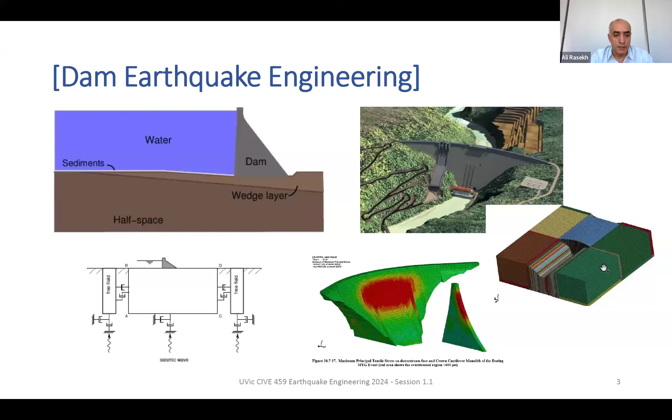This one is from about 5 years ago. This is a model of the Lewis Lake Dam, which is in BC, on the Sunshine Coast, very close to the city of Powell River. It's a very nice arch dam.

The owner was private sector, however the regulators basically want them to check their dams regularly to make sure they withstand the latest estimates of earthquakes, because the estimate of earthquakes in BC or in Canada have increased through the years. They asked us to do a study of the dam's response to earthquake.

On this side, I was part of the team who did a study on a rockfill dam, like this type of dam. They are called tailing dams, and they hold off the tailings, the remaining parts of a mining project.

Similarly, this one was in Peru, in South America, and we did an earthquake study to make sure that during the worst earthquake this tailing dam doesn't fail, which again was an earthquake study, a dam earthquake study.

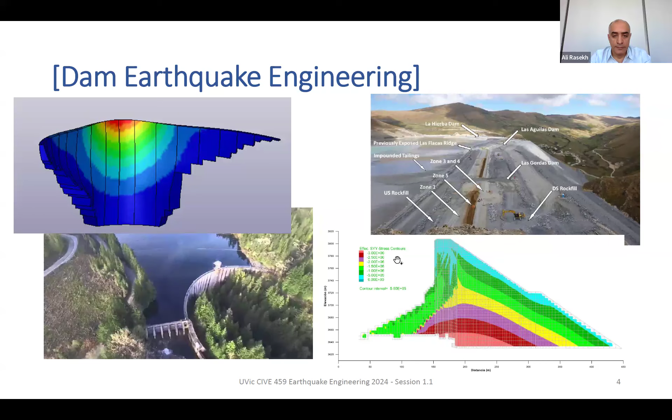So that was generally a high-level introduction of myself. Now getting back to the course, and what I imagine you guys have familiarity with.

We want to do more earthquake dynamic analysis. So I assume you guys already have some analysis background and can complete a static loads analysis. You have some familiarity with the most important materials in structural engineering, which is steel, concrete, and timber, and others. And how structural loads, especially everyday loads, meaning dead loads, live loads, wind, snow, and then earthquake - that's what we do in this course.

But I expect that you generally understand the concept of different loads and how to figure them out using the NBCC code or other related codes. Also, by the end of this term, we will touch on some steel design and some concrete design as far as it's related to earthquake design. I assume you guys are already familiar with the basics for regular, more daily loads.

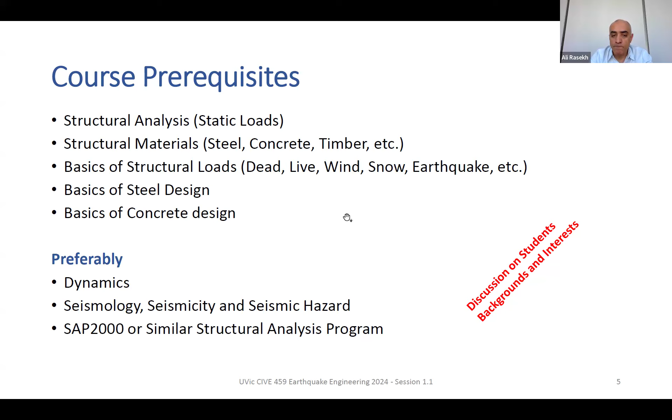Now, if you guys want to, anybody wants to talk about what they think about these prerequisites, or where they are, or do they think the students really meet these prerequisites? Just unmute your phone and tell me about your understanding. Anybody wants to object or discuss further on the prerequisites of the course?

Let's see if there's anything in chat. Okay, thank you. I also think it's good. I think it was developed through years, so there was general agreement and understanding that this is a good idea, that these are achievable as prerequisites or the preferable courses. Excellent, okay, let's move on.

Let's go to the overview of the course. As I divided the course, I divided it into 10 modules. Starting from next week, we will be for 2 weeks at least, but it normally extends a bit more because we need to go through some exercises. For at least 2 weeks, we will be mostly focused on dynamics of a structure, as if it's a course on dynamics of a structure, covering both single degree of freedom and multiple degrees of freedom.

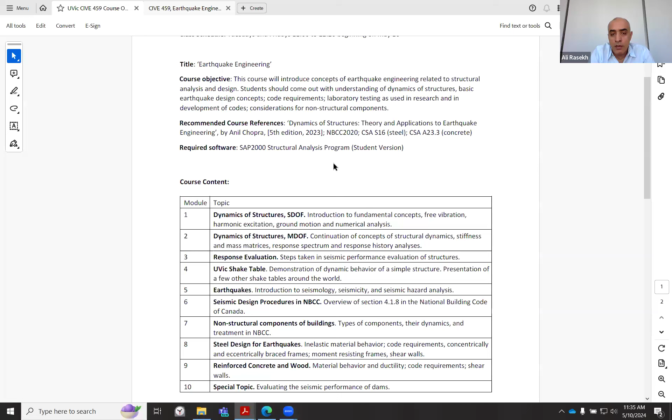SAP2000 is required. I guess you can obtain a license from UVic on your own laptop. There is also a lab, though I haven't been to it myself. I know you can work on campus using department computers, I would assume. Just let me know or email me if you have trouble installing the software or getting the license. We will use SAP2000 in the course, and a lot of students were using it for their projects as well.

Further about this: for the project, which is the main part of the course, 80% of the grade, we have deadlines. I expect the student teams to meet these deadlines. They are not tight deadlines, but at the end you will be happy because when your final exams start, you will have already finished and submitted your report. So it's rewarding both for me, for you, and for the teaching assistant that everything is done on time. Then in late July or August you can really focus on your other final exams, or on projects without deadlines. By the end of July you can say, okay, I learned a lot at UVic Engineering, and this course is over. you will present your work on the 26th or August 2nd, just randomly picking teams for these two days. So remember the deadlines, and I will enforce them because everybody benefits from them.

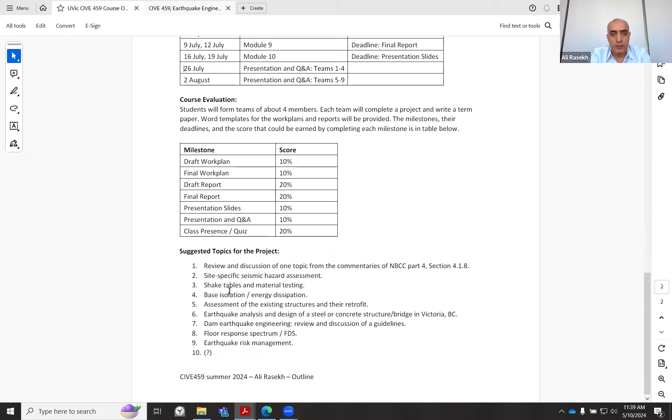Already, so these things, suggestions, I think I had suggestions in the other slideshow as well. Templates, okay, yeah, let me show you the templates. I sent templates, I prepared templates for the work plan and the report so that you are not lost. You generally know what I am looking for and what the teaching assistant Behnam is looking for.

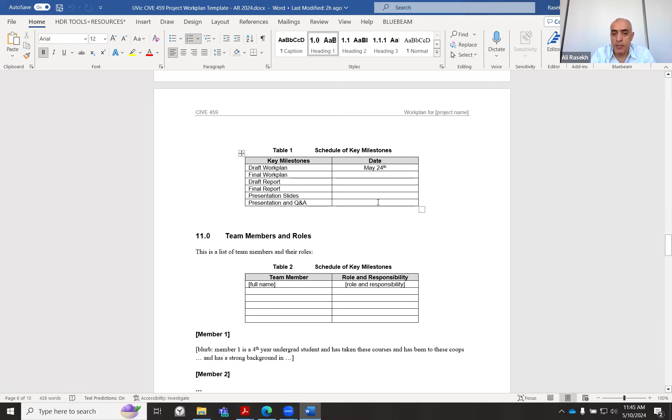You can acknowledge the deadlines, which are in the outline that I sent you—acknowledge that you will meet those deadlines. For your presentation day, after I know how many teams we have, I can randomly pick for the 2 days that we have for presentation.

Here's a list of team members, and you can assign different roles if there are different duties in your projects. Divide the roles already so that everybody is committed.

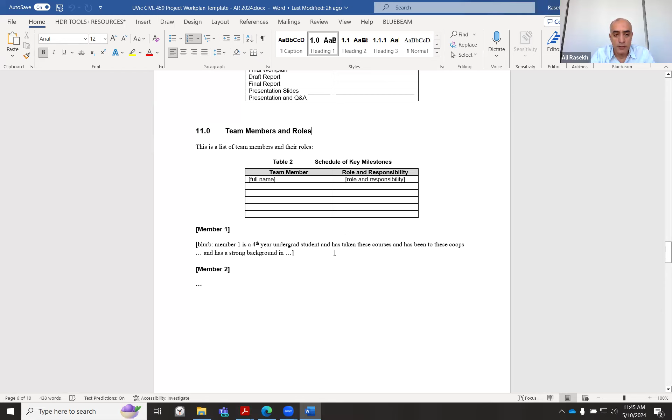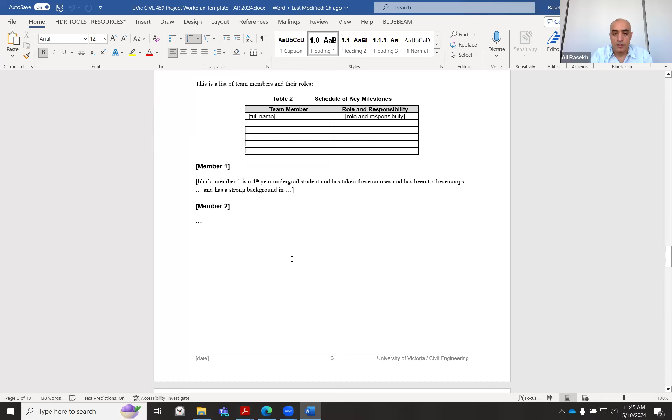And a very brief CV of the team members also—include that for every member: 1, 2, 3. Say it's like third year student or fourth or fifth, and has done some co-ops or not. Just explain that a little bit.

Appendix number 1 is also mandatory here. As I said, I don't want teams to overcommit or undercommit. So for the mandatory milestones and also for other milestones you create yourself, try to guess how much time each team member will spend on it.

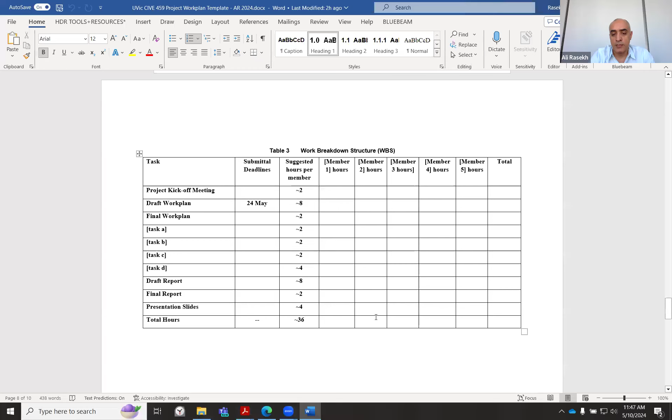This is from last year, but I had thought about it—I thought about 36 hours is enough per team member. Just estimate, try to guess. If somebody says I like it too much, I'll spend 44 hours, that's fine. Another person says I want to spend 34 hours, that's okay too—it's good for you because you know how much commitment you have, and you spend that amount of time and finish the project happily instead of getting anxious.

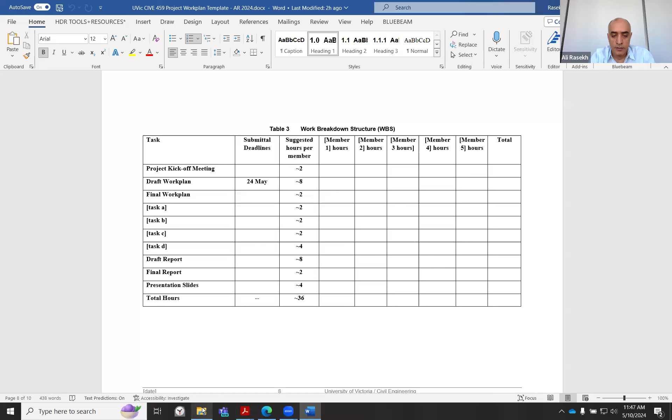Yeah, again, you can—that's what we do for our proposals. We add CVs, so add your CV as well and any other appendix you think is necessary. That's the one you will start with. Then after the work plan is reviewed by us and approved, you start working on your final report.

For the final report, the cover sheet is the same: cover letter, proper list of contents, tables, figures, appendices, etc. Remember that you already promised in your work plan to present your report in a certain way with certain titles. So you can just copy it from there, bring it here, and fill up the spaces—introduce, state the purpose of the study, and go through your project. You've probably done tens of reports, so maybe you're a lot better than me, but at least meet these minimum requirements.

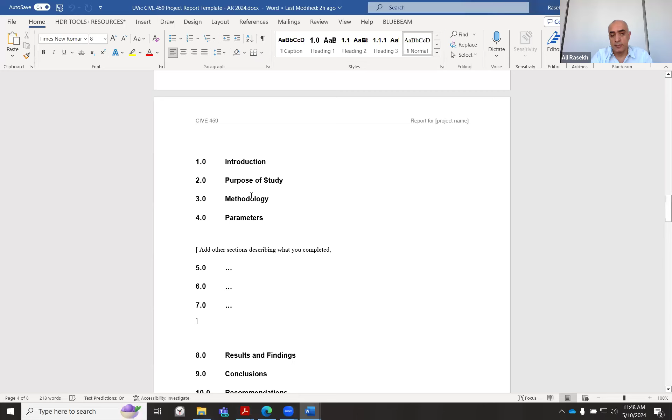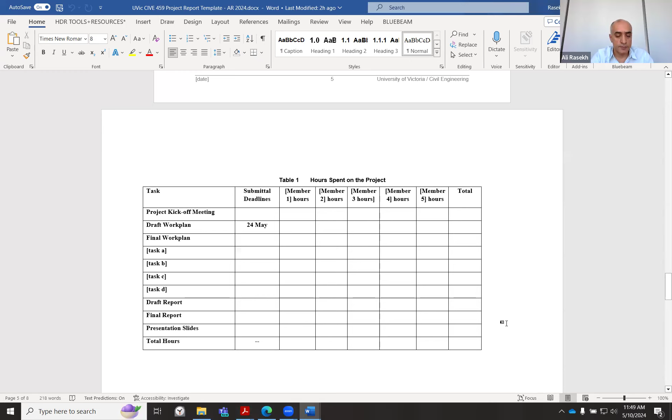I also want you, at the end, to go back to that table one more time and fill it up, saying how much time you really spent. This is good for your own good, and in future you'll always have to work within a certain time and budget. It's a good exercise to know, I had 36 hours to finish this but spent 40 hours—that's fine, you write it down, or I spent less or more. This is a good exercise related to industry, and it gives peace of mind because you know how much you committed and you do that, not more.

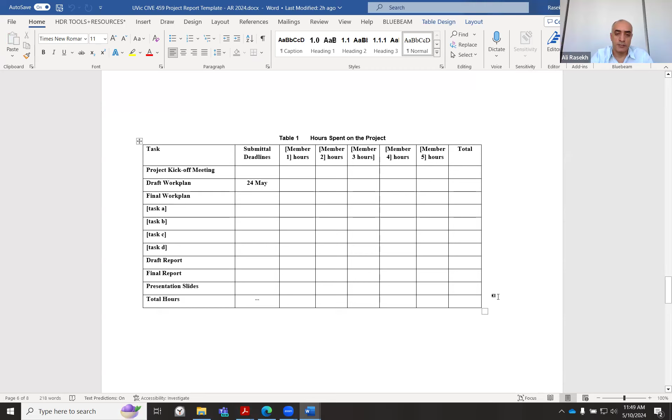Some students do a lot more, and some delay until they become anxious. So if you want to avoid all that, just do the task and be happy about it. Your project will probably have other appendices based on your work, so you can add appendices. Again, if you have questions about these two templates, just email me—I can answer questions.

Back to the introduction. So you know what we want to do: write a work plan, then proceed to the report, do the project, do the report, have some presentation slides, and present it to the class. That's the main task you will be scored for.

Project suggested topics—I just did some brainstorming on what would be interesting for students or for their future role in the industry. A very good understanding of NBCC is always rewarding. We can do some research on the background, or go through the commentaries of NBCC. I think the 2015 commentaries were available, but I couldn't download the 2020 commentaries, or maybe I didn't look hard enough, but I'm pretty sure the 2015 commentaries are there. You can do good research and understand the part of NBCC you're interested in. Even an exhaustive research is good enough—you don't even need software, but do exhaustive research, understand it, look at some papers, or use software to do your own study and understand the commentary. That would be great and very important for your future work in earthquake engineering.

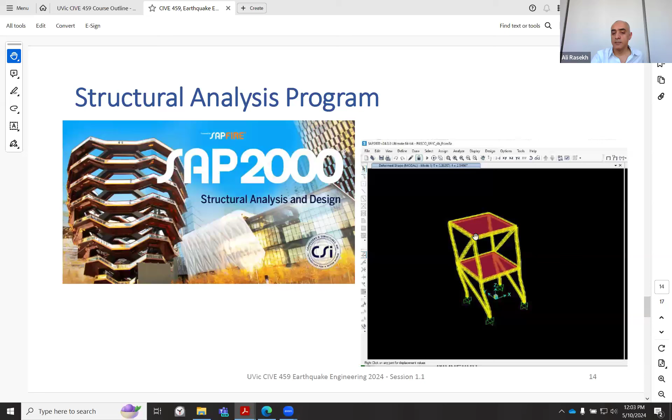It's always interesting to see the shake table simulation, because similar to what you see in your computer model, this is a computer model of the small structure we will put on the shake table. It reconfirms that we are really trying to model the real world, seeing the same results in your analysis compared with the measured values on the shake table. It's like reaffirming in your mind that you're really trying to estimate the real world through computer analysis.

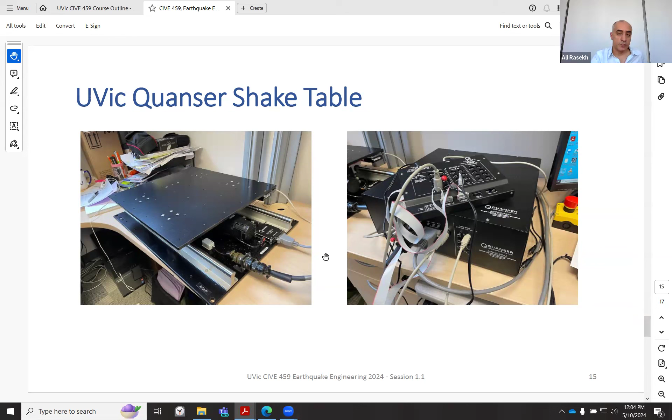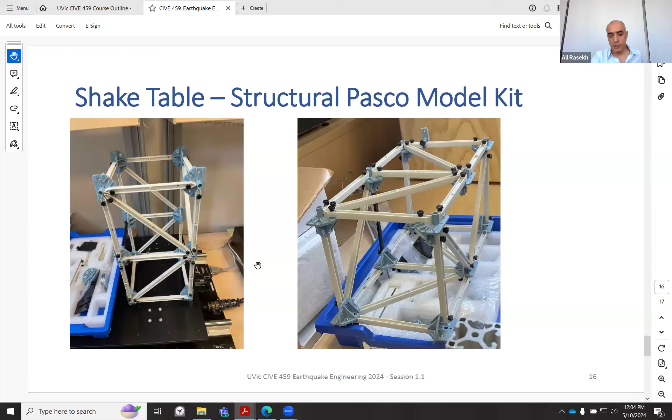The structural model we'll put on the shake table is called the Pasco model kit. We're supposed to do that. As I said, last year we couldn't really go through it, but there was a video, which I showed to the students when I was in class. We shake this structure, built of Pasco, and try to measure deflections or displacements, etc., and compare it with the computer simulation.

Looks like this time we were fast, not many questions or discussions arose. This is the end of the introduction, so now there's more chance for questions. Maybe I went too fast, or maybe not, but I thought that last year I was interrupted more by questions.

About the outline of what we will do, which I already sent you -- that's important to know what we're going to do -- and the templates I sent about the projects, it's super important to have them and use them. You are welcome to modify them a lot. Sometimes even I want to start from scratch, which is annoying, but if I have a template, I can make a lot of changes. So you're welcome to make all the changes you think make it better.

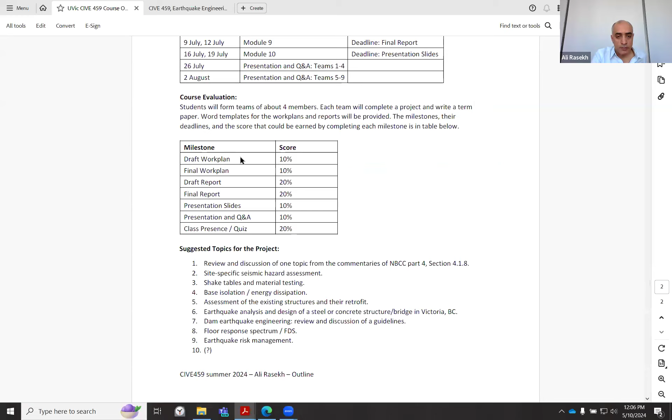That's what we have. At least let me try to open what we're trying to go through next Tuesday. If there are no questions or concerns, just interrupt me anytime. I'm just going from last year, I haven't adapted it for this year, 2023... I mean 2024, so that's what we'll do next Tuesday, which is the 14th. I'll slightly edit it, just changing the year or a few other small edits.

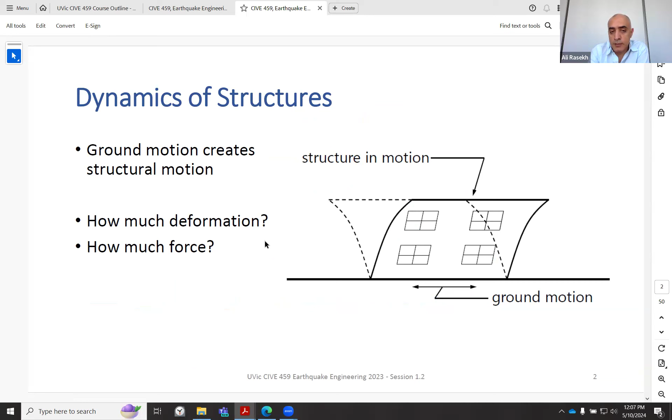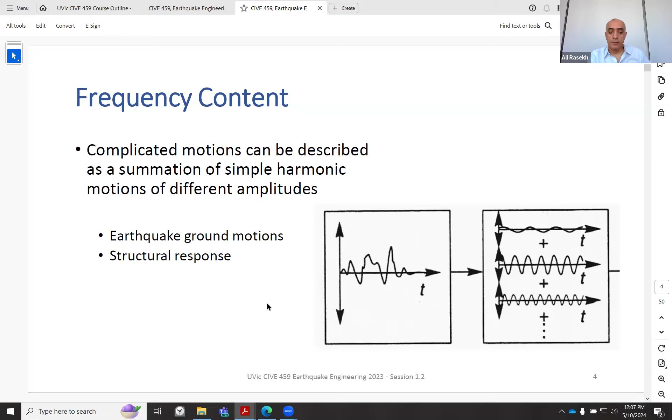Next week we will go through a single degree of freedom, generally understanding the dynamics of structures and ground motions. We'll have one, maybe two sessions on ground motions and earthquakes, just generally what ground motions are, some nomenclature or terminology in earthquake engineering, what a single degree of freedom could be in structural engineering, and the equivalent static load, which is very important -- that's the National Building Code of Canada method.

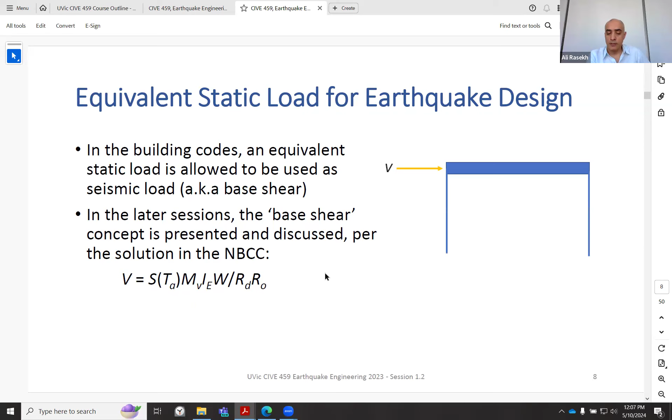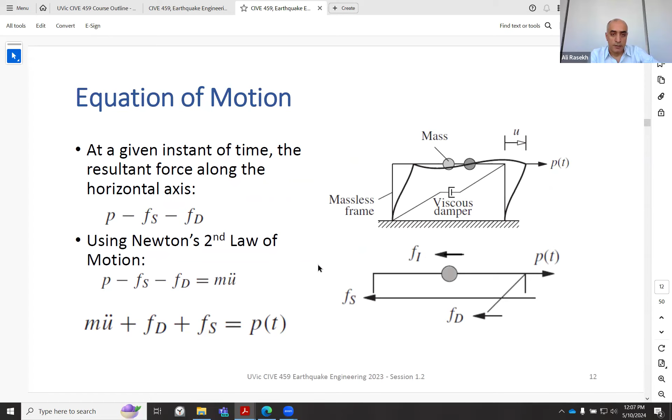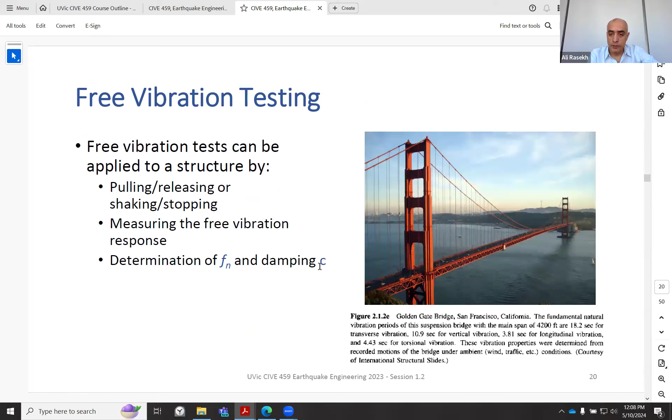That's pretty much what we will do Tuesday, and that's ready to go from last year. So maybe if there are not many questions, we'll finish like 10 minutes early.

As I said, maybe the first few days you will think about this, you will send more emails than usual, ask questions, something came up.

Will we be randomly assigned to a group if we do not have one? I try not to make it random, but I will introduce the people without a group to each other, and then they will decide. So it's slightly random, but if there are only 3 people left, like last year, I think it was like that, even though the class was 45, 6 people, then 3, 4 people were left out for different reasons.

They had no other way except to live with each other. I mean, I prefer, as if I was the student, to work with people that I know, since we are together for 4 years, so we have some knowledge of each other and share the same interests. Maybe, but it always happens - at the end, 3, 4 people haven't found a good partner for the project, and then they have to work with each other. Did I answer your question? Was it okay?

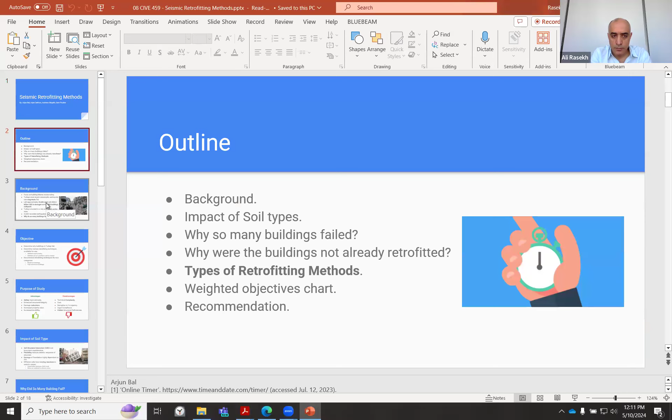And also, one of the groups had something like this - let us see if there's a PDF. This is the report, I can see the report over the presentations. Okay, let's have this, right, just go quick, say this.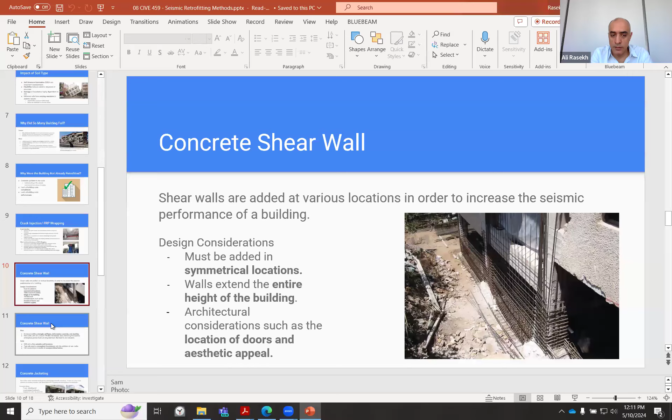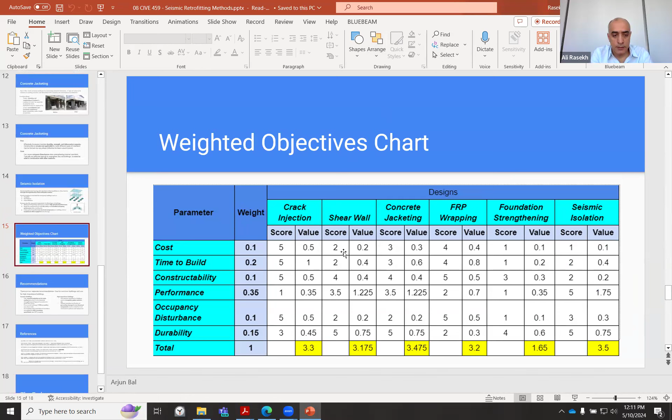This isn't hugely even mathematical, but they had done okay research and had some points to make. Everybody appreciated that - like we learned, as I said, from many of the presentations, everybody learned. So this was a good example because they had some analytical thinking and checking on some numbers as well, and then their references, what they had studied.

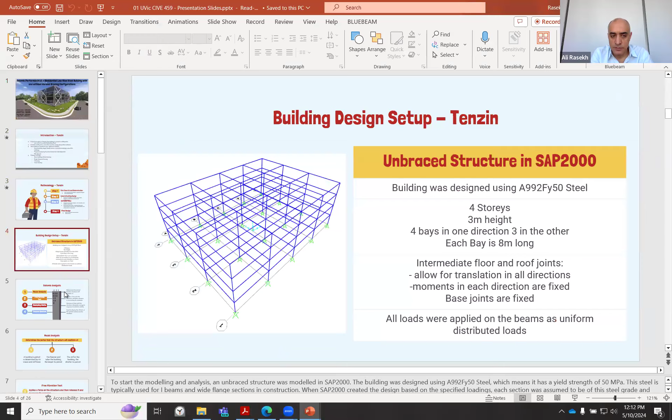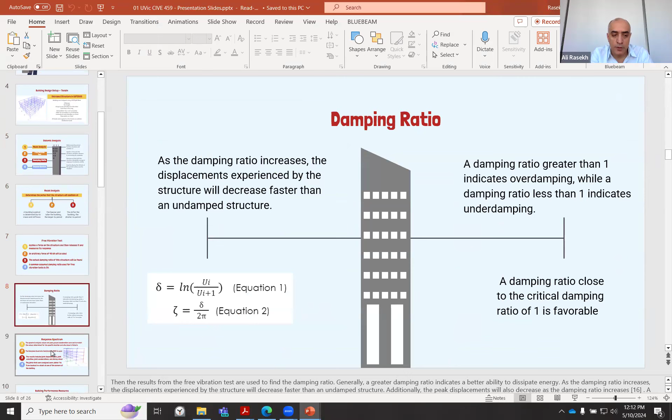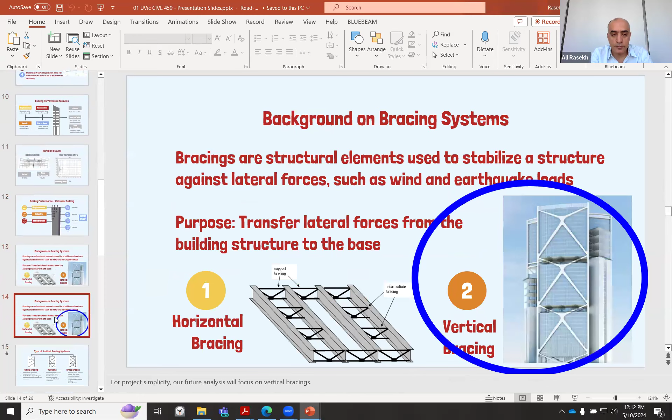We had some other presentations which were like completely a design project. I don't see a follow-up question, but hopefully this is helping you see the level of work that was done last year. They were mostly okay, like okay projects, and I enjoyed most of the presentations myself.

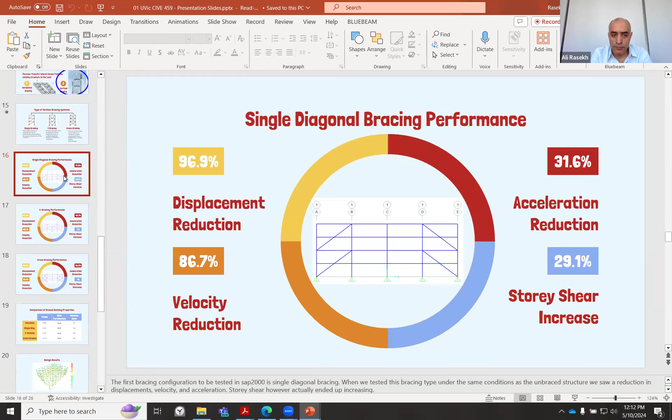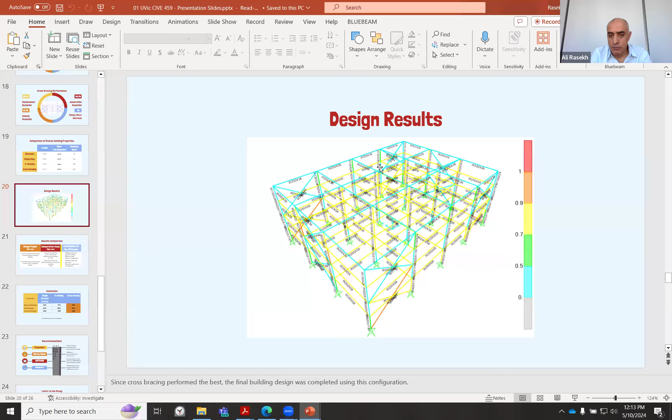Some study on the effect of different types of bracing, some attempt in modeling using SAP2000. So they have tried to make the presentations enjoyable as well.

Did it help? Did these two presentations that we browsed help you? Okay, yeah, sounds good. Tell me if there are questions that I can answer now or concerns. Okay, I can give you about 1 more minute and then we close off. I'm hoping that everybody has a very enjoyable weekend.